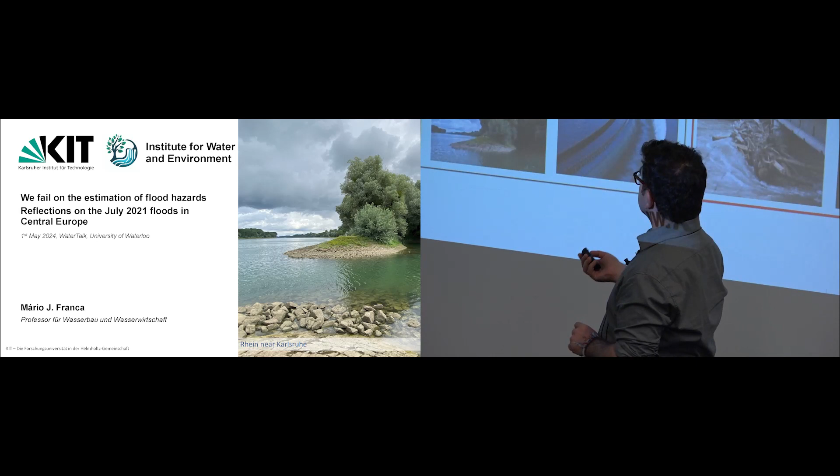Just before that, I want to present ourselves a bit. In Karlsruhe, we have a group, an institute, called the Institute for Water and Environment. We have 5 professorships. Olivier Eiff is here as well, he came to visit, and David Evans, who is in my group, is here too.

We embrace research from the very fundamental aspects of fluid mechanics, and then there's a kind of growth up until more practice-oriented research. So we do the bridge between fine-scale research, if you want, towards the application.

We have two positions that will open very soon, in case we need good candidates. They are tenure track positions. One, hopefully coming before the summer, though administration sometimes takes time, is in fluid structure interaction. Another one in urban water management will come a bit later. We have to search for good candidates because they are rare these days.

Some more information about ourselves, since we are searching for collaborations and internationalization of our programs. We have a master's in English on water science and engineering. It's an international master with 3 profiles: one more oriented to water quality; one, where me and Olivier are, more focused on fluid mechanics and hydraulic engineering; and one more on hydrological processes at the catchment scale. It's a 2-year program, all taught in English, which may be an attractive opportunity for some of the students.

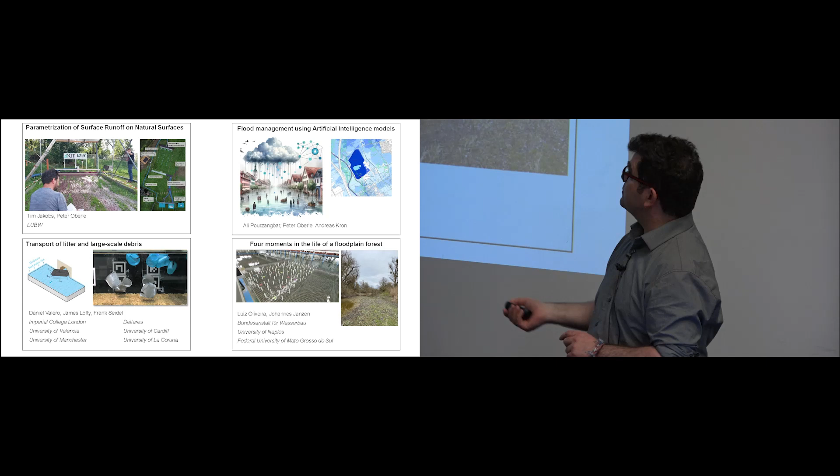This is my group specifically. I'll go briefly through it, but as you can see, our aim is more on the practical, application side. We have a laboratory with 25,000 square meters, so it's a big laboratory where we have bigger installations, also for reduced models, consultancy with reduced models, but also for fundamental research.

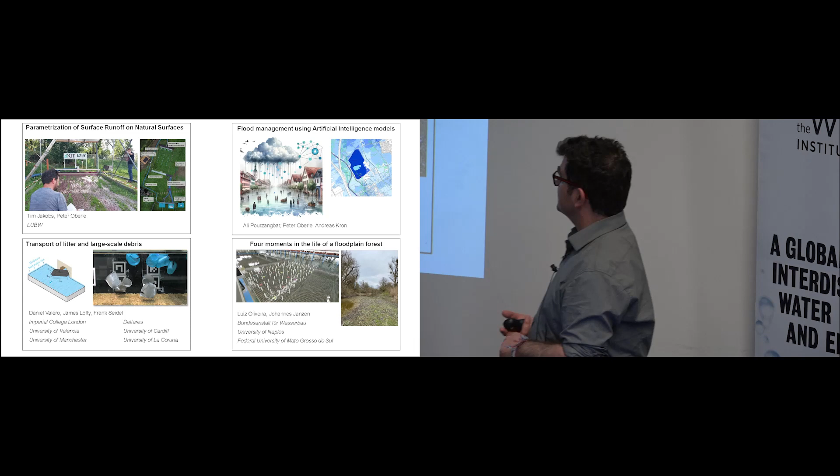Some examples of research we do at the moment are all more or less related to hydrodynamics aspects, but also mechanics of transport of sediments, of plastic as well, and some eco-hydrology programs. Maybe what's more interesting for today's talk: we hired someone last year, Ali Pourzangbar, a postdoc, who is trying to apply new techniques to speed up the process of understanding floods and also to speed up emergency planning in terms of flood management.

That's all, okay? Let's go for my talk now. So first, why am I talking about floods? Probably Bruce or Colin or someone has heard me talking about floods.

I've talked about sediment transport and turbulence and these things. But I worked as a consultant for several years, and I did many flood management projects.

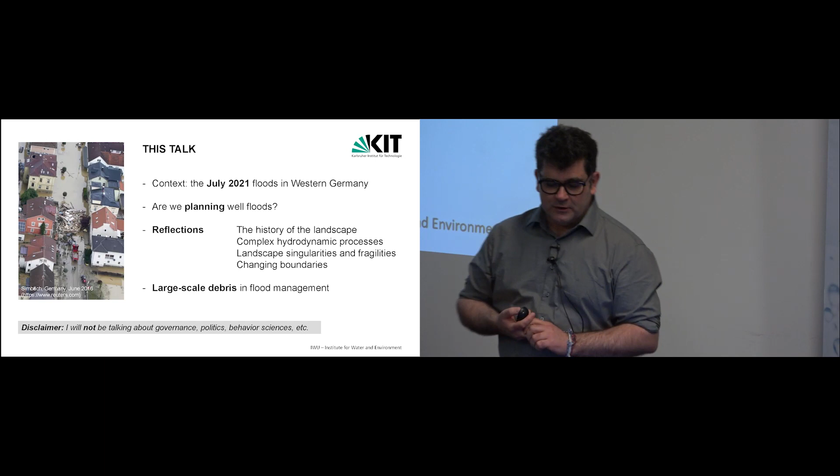The talk today will go through these aspects. I will introduce the July floods with some general information that I have. Then I'll make a challenge with you, and then do reflections - as someone working on rivers for several years, we look at floods, we look at what happened, and these are things I think we should be looking at when we plan for floods. I will present some new results of research that we just published last year and this year, inspired by what we observed in the floods.

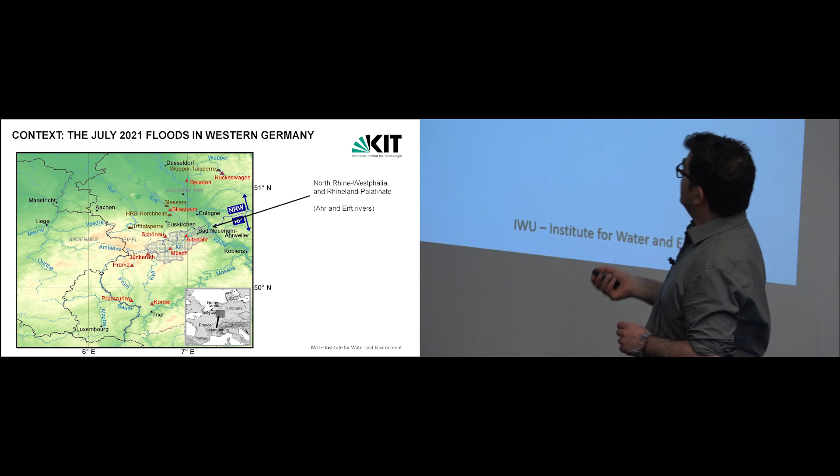This is where the floods happened. The main affected region in Germany was near the border with Belgium, Luxembourg, and the Netherlands. The main problems occurred in the Ahr River and the Erft River in this area. Near the border of the three or four countries were affected, but Germany was heavily affected as well.

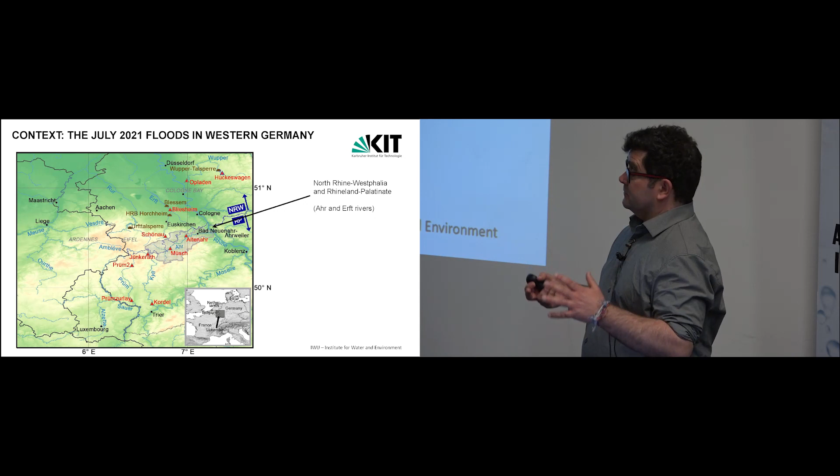These are general numbers, but just to have an idea - 6 inches, I hope I did the conversion correctly, so 150 millimeters occurred in less than a day. It's a lot of water pouring down, and this was due to a convective storm that stayed there for some hours and just poured down all the water it had.

Big numbers - I think this isn't even updated, so I think it's a bit higher, almost 200 fatalities. For a country like Germany in the center of Europe, for Europeans, it's a catastrophe. It's even damaging our way of thinking. It was quite a paradigm change, and it's somehow prompted lots of research about this as well.

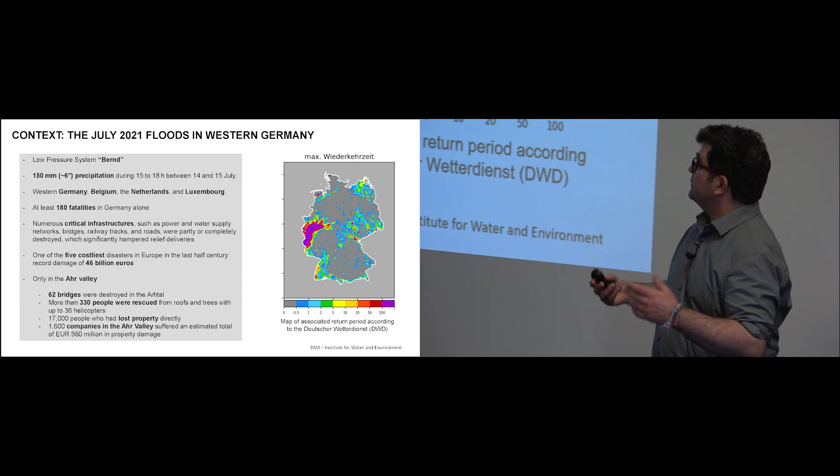Just some examples of big numbers: 62 bridges collapsed in one valley, and many other disruptions. For several days there were disruptions in communications and transportation services. So it was a significant disaster that occurred.

Now I'll put a question, I'd like to make a kind of game with you. I don't know if you were Boy Scouts - I know that probably you were, and you probably did this game. Do you know the Kim game? I will show you some images, and you just have to remember what you saw, then I take the images away and you tell me what you saw. Is that okay? We'll do it fast - I will count to 5 and change the images to make it fast.

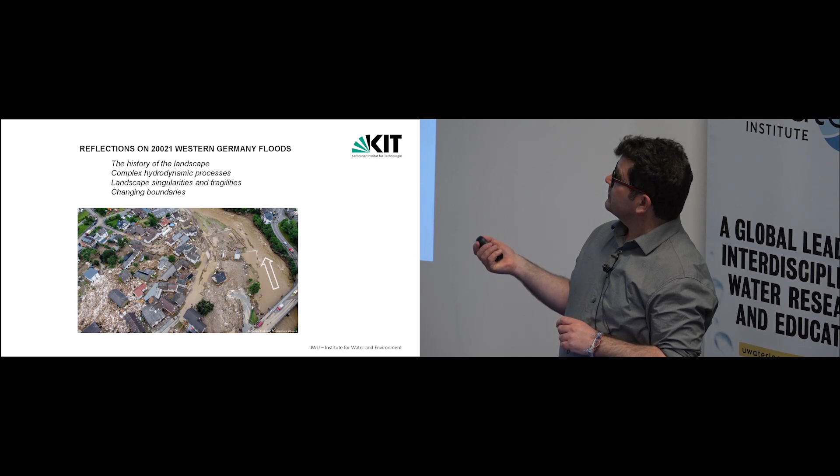We will see lots of images like this, quite catastrophic as well. I'm going to talk about four topics. They are very personal reflections, so they are questionable, of course, and we can discuss them at the end. The first is...

What I said, we should look at the history of the valley, and I'll show you what. Probably it depends a lot on the countries, but in some countries it's still possible to construct, for instance, in floodplains, in places where we saw things happen in the past. I just brought this example.

Those studying rivers, they know what this is, and you know what an oxbow lake is. So a fluvial hydrologist or hydraulic engineer should know these processes that happen and should recognize when they see a landscape, some remnant oxbow lake or something. And probably should also know that we should not build there, right?

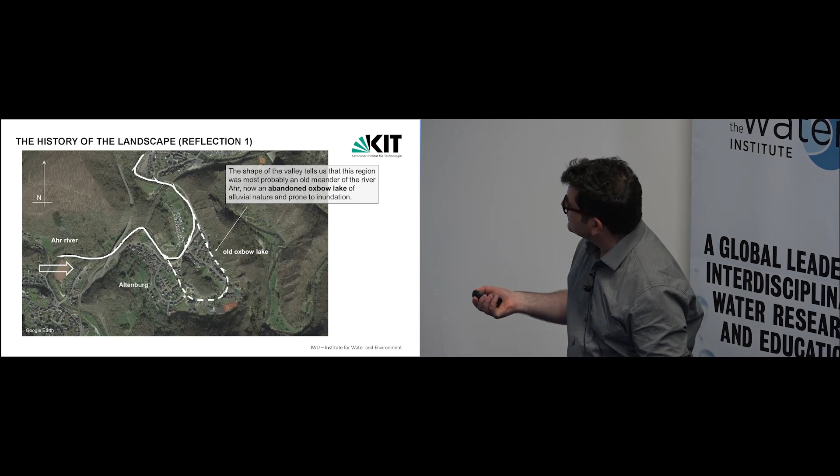So this is one of the things we brought. This oxbow in the Altenburg, which is in the Ahr valley, one of those two rivers affected - this is what happened, so that's the effect. The flow goes like this usually, and this here. So basically the urban development was all made in the Oxbow Lake, which of course with time, well, things could happen. So this is the first reflection.

Maybe it's a bit obvious, but apparently it's not so common to think about these things yet. There is an advantage downstream - this is a small one, but of course all these oxbow lakes, all these lateral areas of the flood, will contribute to somehow mitigate the flood. So maybe it's even good that we are here and that we can activate them. But of course, settlements in these areas should raise some flags and should indicate that we should not build here. They are reconstructing in the same site, just in case.

I think that's one of the problems now. The second - I put this image as well. I'm not going to go into these details here, and Colin is here, he will even detect some errors that I can do about this. But we know some things that happen in rivers. We don't know everything, right? But for instance, we know how the flow processes in a riverbed.

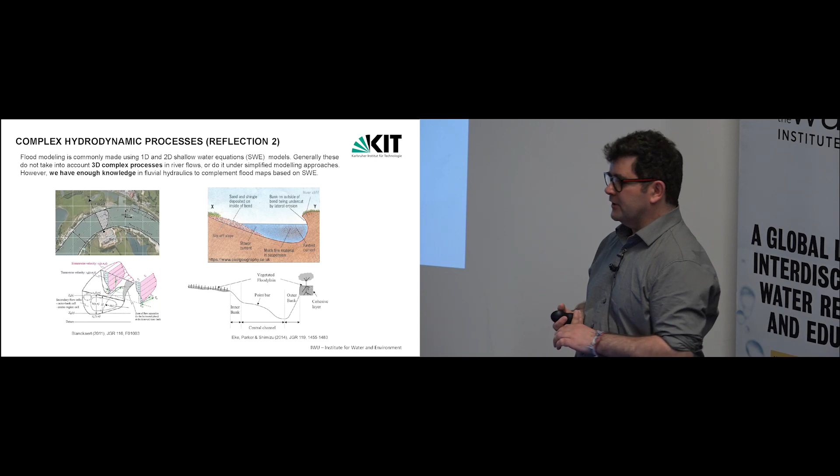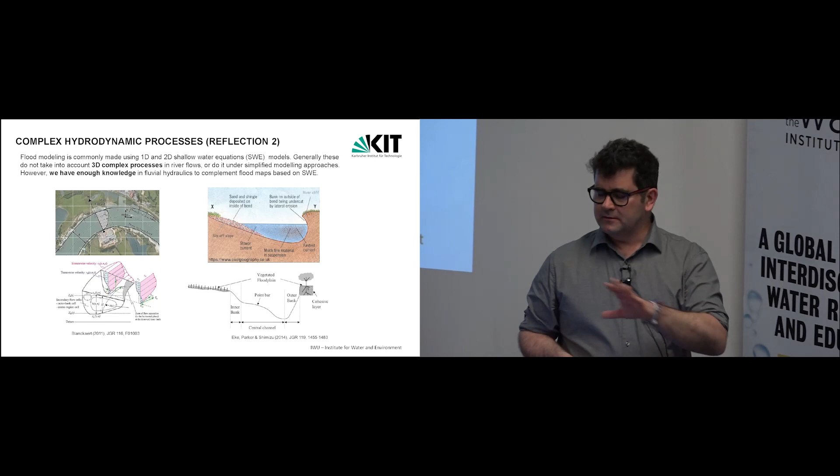These are images from classical studies that we found in the literature. And again, when we do our flood propagation, typically, okay, maybe in this channel we'll use a 1D model, we'll just propagate the flood laterally, but we could at least see, oh, there's a bend, there's something that can happen here. So it's a second reflection - we know better than we are doing, I think, in my opinion. At least we have more knowledge than we are applying.

So this is another river, this is the area as well in Schuld, another town. I'm not sure if it's downstream or upstream of the other, which has the river going here around with a nice meander, it goes around here. And this is a pre-flood, a pre-incident image, if you want. It could not be very hard for a student in fluvial morphology to imagine that in a flood, we could have some deposition here and some deposition here, all along the valley.

Again, this is what happened in the valley. So this area here, it's not indicated, I'm sorry, but it's somewhere here. And I think this is an image from the top here - this is more dramatic, we can even see the streamlines of the flow almost with the trunks.

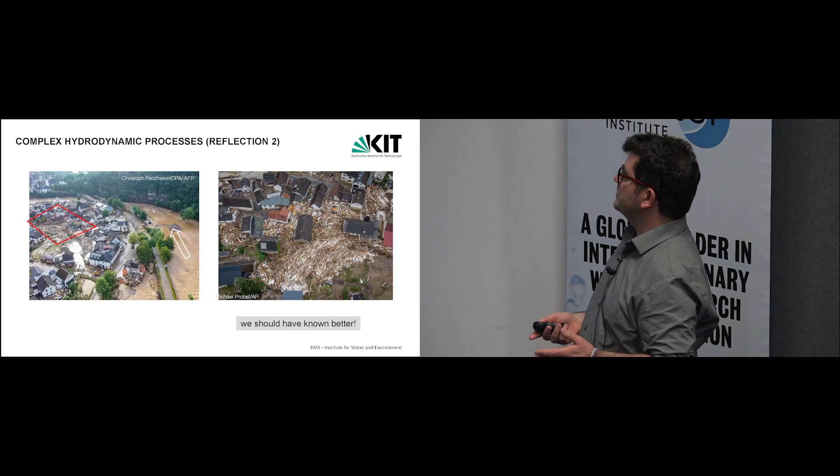So again, the question - yes, maybe we should have known better. And of course, it's very hard to model the whole valley if we want to do something efficient in the company. But we could just, after our modeling, go around and see if there is something that, okay, maybe here we may have a problem, maybe here we shouldn't. So second reflection: the complex hydrodynamic processes - I think we already know enough to somehow integrate them, even if it's just ad hoc and a bit simplified, integrate them into flood management.

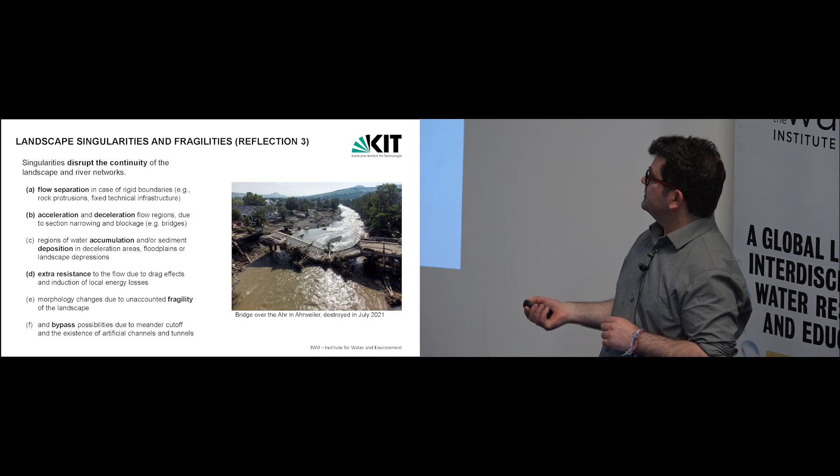The third reflection is about landscape singularities and fragilities. We know that if there is a singularity in the flow channels, there will be flow separation, phenomena of local acceleration and deceleration, and these will also impact flow resistance, local erosion, and deposition.

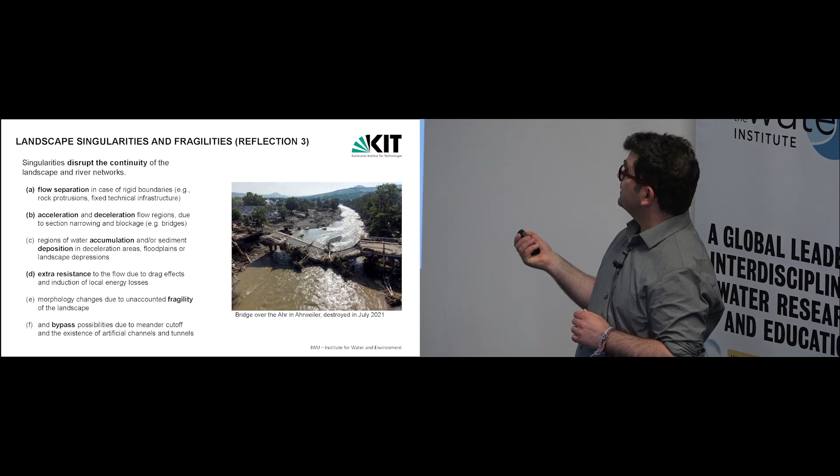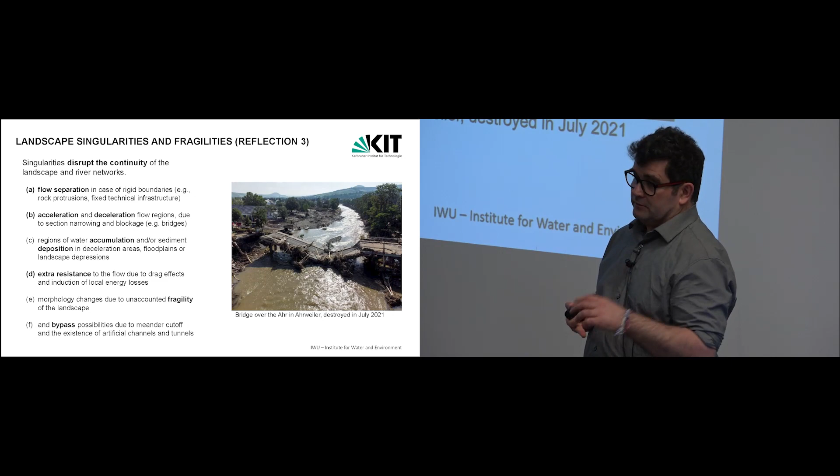There are some clear examples of not very well studied singularities. The most obvious singularities in the river are maybe the bridge piers, which we are not studying well. This causes specific and singular problems in the valleys when floods happen. As I said before, in this valley, 62 bridges were destroyed, and the financial impact of this is huge.

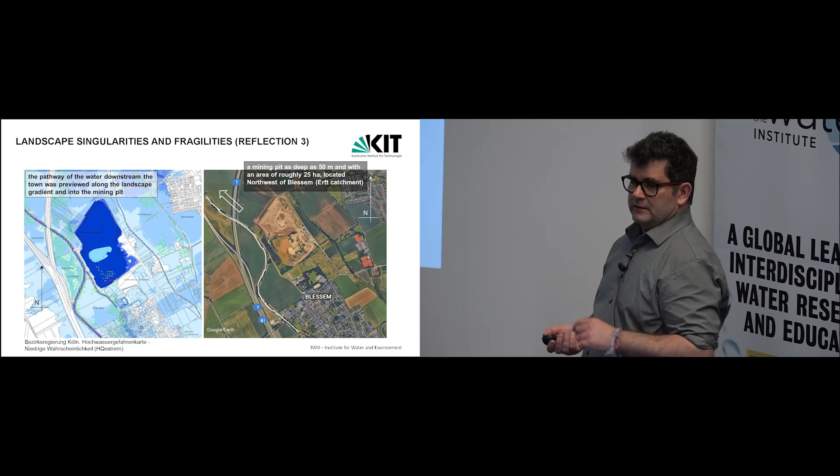I'll pick up another example which I think is more interesting. Let's look at this image first. This is the flood map for the extreme flood that was done for the municipality. The river goes somewhere here. The flood map preview isn't very clear, but the darker blue is the inundation areas. It was already previewed that mostly this area of the town would be flooded.

But this is interesting, I just checked this on the internet - these are public records in Germany. You could see there's this special feature here. Someone who made this flood map indicated some strong velocities in this area.

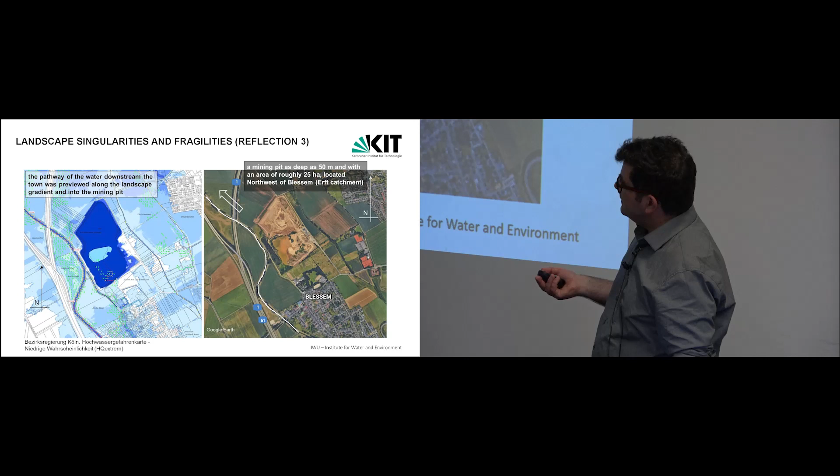This is a Google Earth image of the same area before the flood - the river goes here. What is this here? This is an old mining pit, still active I think, where they extract gravel. This was maybe 50 meters or more deep.

And what the flood map says is that somehow the water will go into the pit during the flood. But nobody really looked at this detail - we look at the map and do our emergency planning, and nobody noticed this. And what happened was this.

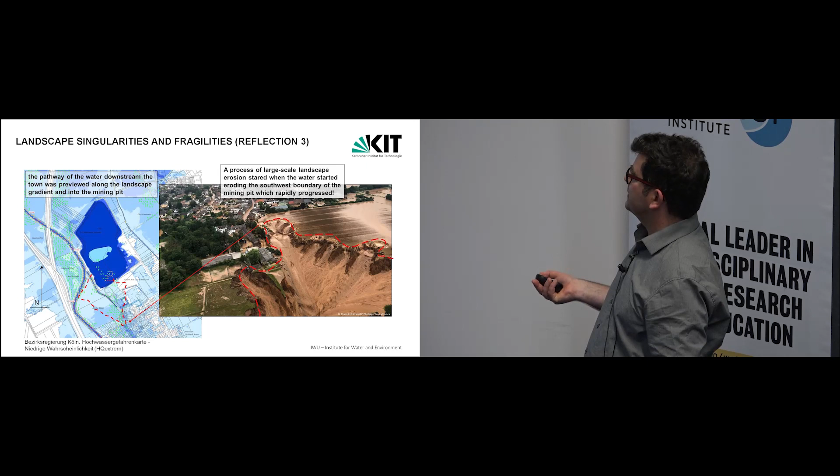Let me explain this image - this line here was reconstructed by me, so there is some uncertainty. But basically the flow went inside the pit and carved this huge crater of 20 meters, which just stopped at this building.

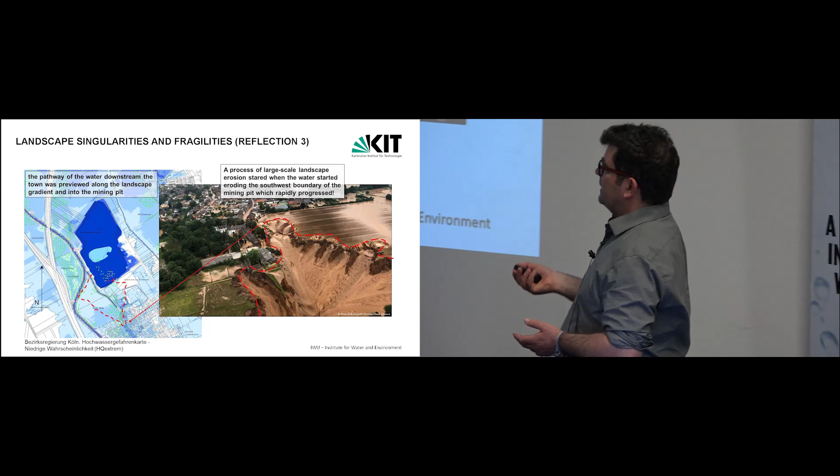What we may argue is that if we do our flood maps, we can even look at velocities because we have that data. If we want, with something like an HEC-RAS simulation, we can even get bed shear stress - it's an estimation, a model, but we can have it. If we put that on top of a geological map, we might have imagined this could happen. We couldn't have modeled it exactly, but some red flags could be identified at the planning phase.

I don't know exactly what will happen, but something will happen, so maybe we reinforce this area or prepare for it. There were other singularities and fragilities in the landscape that could have been foreseen with a better inspection of the flood mapping and flood emergency planning results.

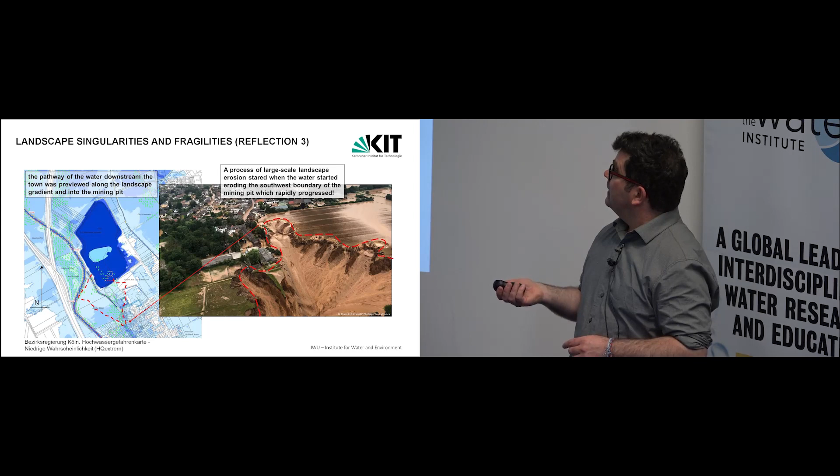Here's a final diagram, let's see if we understand. The original pit was here, this is where the water went in this section, this is the building that stayed hanging there, and this is where the erosion happened. The channel, the river, went like this and like that, and it dried afterwards.

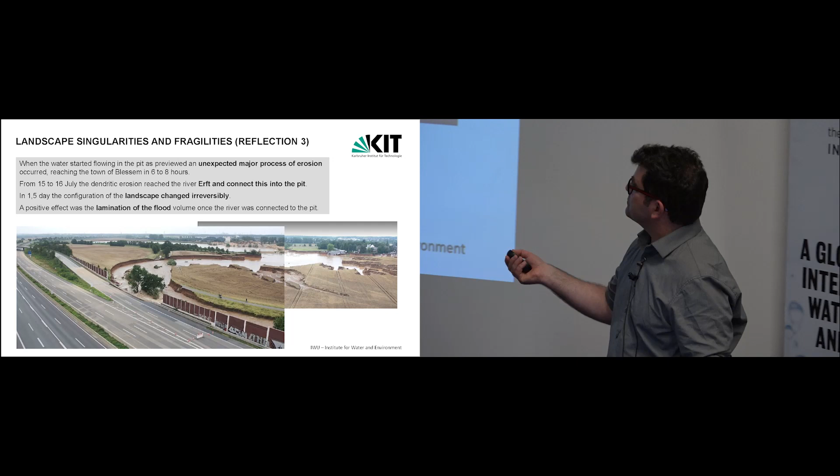At a certain moment when this happened, there was an advantage - the flood stopped downstream because that pit was so big, it absorbed the rest of the flow.

There's also another point - there are lots of these mining pits spread around Germany, especially in the Rhine valley, because it's alluvial and full of gravel, which was heavily exploited for construction. Maybe we could use lots of these abandoned pits to attenuate floods one day.

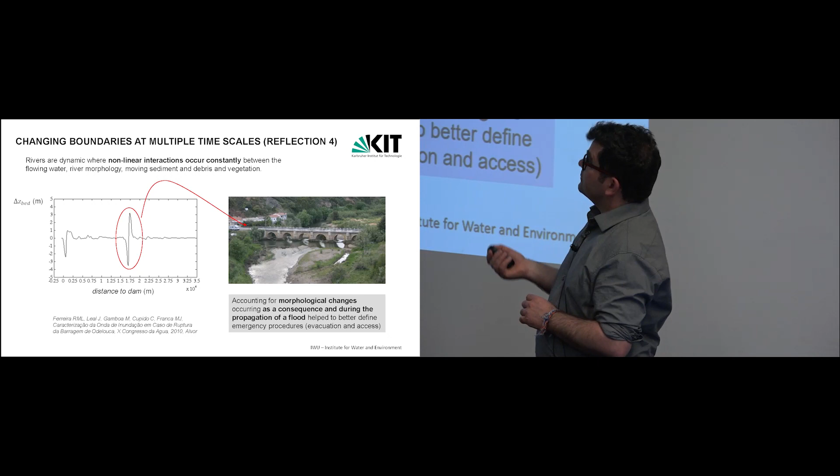The final reflection is about how the boundaries are changing during and before the flood.

This is about how we do flood planning or flood management. We look at the channel, use LiDAR, take today's topography, and do our modeling. Even if tomorrow the topography is different, it stays there for 20 years. I don't know how many times you review these things, but we don't really care. But the truth is, if there is a flood, things change, before the flood and during the flood.

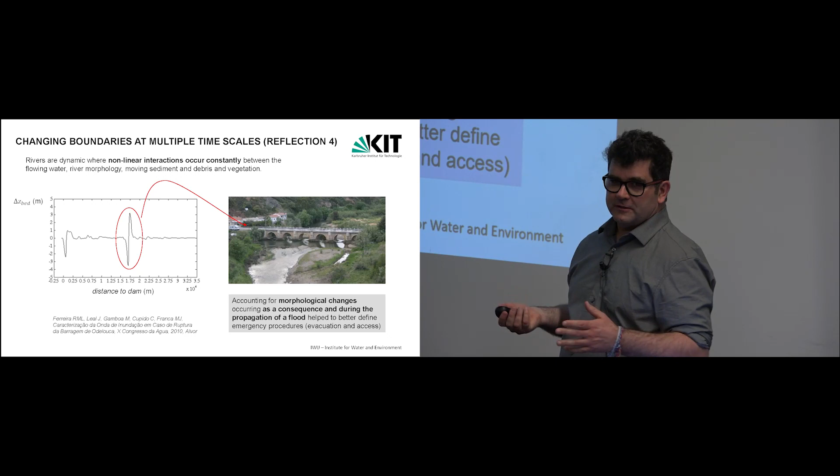I bring an example that was not proved or validated, but something I did some years ago with a colleague from Lisbon, Rui Ferreira. We did some consultancy for dam break emergency plans for dams, and this was a dam break study. But we are academics, so we decided to look further.

So we used the model from Rui Ferreira, where we can see the dam break propagation, but we also can see morphology changes in the valley. This is the valley downstream of the dam, a dam in the south of Portugal, about 3.5 kilometers downstream. This is the result.

This is the bed, how it changes. This is the delta Z, how the bed changes downstream the dam in the case of a dam break. We detected this in our simulations: there will be a huge erosion pit and then accumulation, which corresponds exactly to the narrowing of the valley, where there is an old bridge.

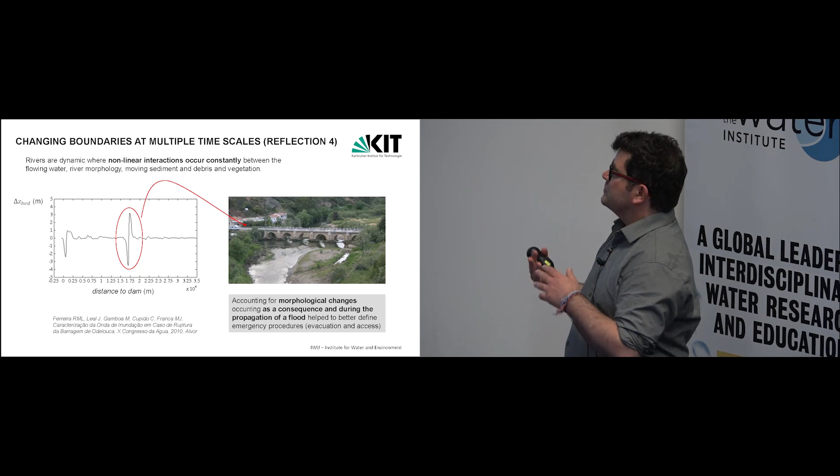The access to the dam requires crossing this bridge, and the firemen and civil protection are positioned here. So we forced the civil protection to change their whole paradigm of emergency, because we told them this bridge probably won't stay in place if there's a dam break. We succeeded in convincing them and they took us seriously, but for future studies we told them they should ask people to study morphology changes too, because there are things we don't otherwise see.

I don't think this was accepted, but this is an example of how we should consider morphology changes in a dam break case. Of course the models have uncertainty, whether it's 4 meters or 3, but something will happen there. If we look at it, it's obvious that something will happen.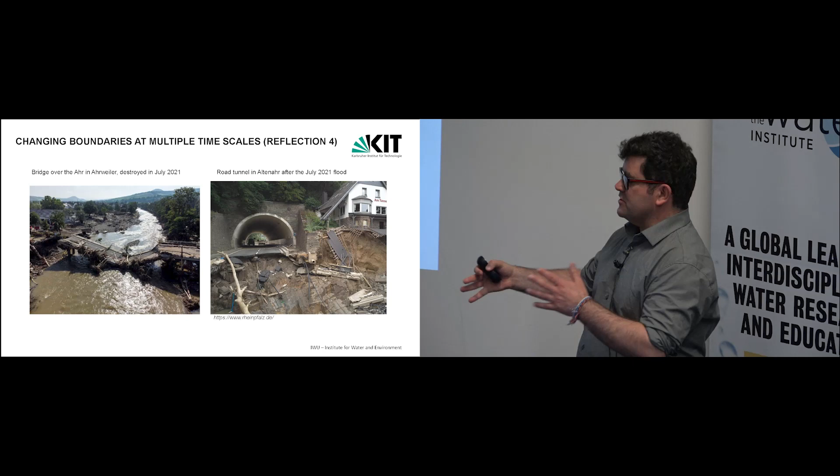So many things happen during floods: erosion, local erosion of bridge piles, destruction. This was curious, the water just entered a tunnel and provoked huge erosion here. There was a huge erosion here that changed the aspect of the valley completely. I think we're starting to have models, even with some approximation, that tell us the main morphological changes that may happen during a flood, and we should use them.

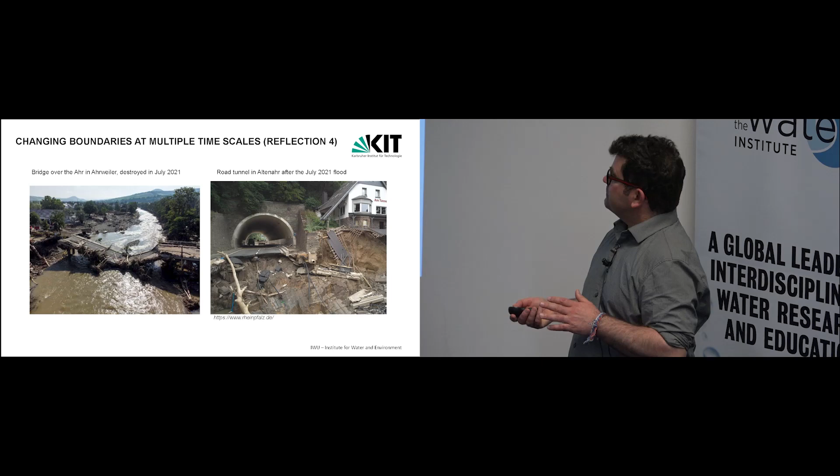But I'm going to talk about other things as well. I think the valley has multiple changes at multiple time scales, these are the time scales during the flood. But for instance, this valley in the town of Dernau, the Ahr Valley, also changed along a century. In the 1880s, they constructed the Ahrtal railway system, called Ahrtalbahn, the railway of the valley of the Ahr, which ran through the valley, I think as a scenic thing to do.

Let's look at the valley. The river comes here, the river Ahr. This is really a lateral floodplain, very flat. You can't see it here, but this area is quite steep, the banks are steeper here than there, it's quite carved, and then it widens again here.

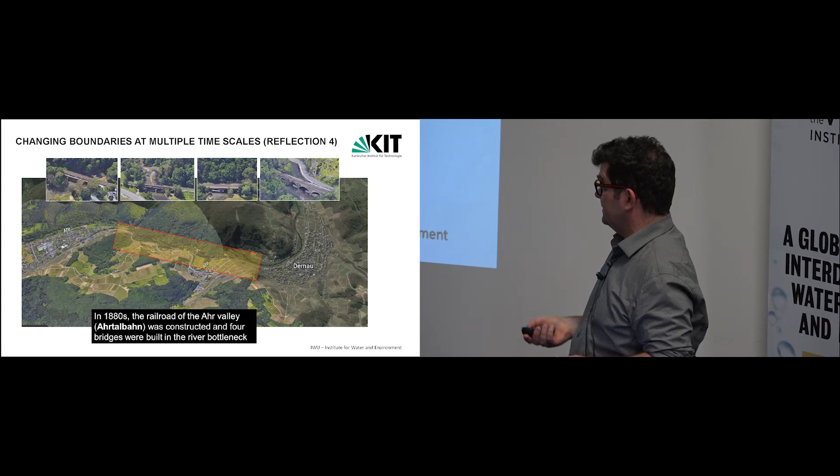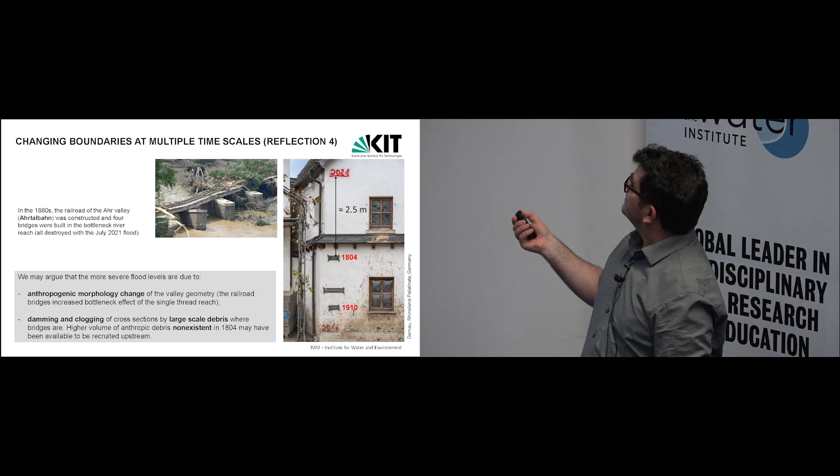So the Ahrtal railway was constructed here, and along this part they built 4 bridges, but those old bridges from the late 1800s all collapsed, so the Ahrtal railway just disappeared. We don't know quite what happened, but probably they collapsed, got clogged, and there was a dam break. By clogging, what happened in the Dernau town was a flood much higher than before.

Our hydrologists and meteorologists could reconstruct this huge flood from before the construction of the train system. They said, don't ask me the methods, but the maximum discharge was pretty much the same as we had 3 years ago. But the effects were 2.5 meters more.

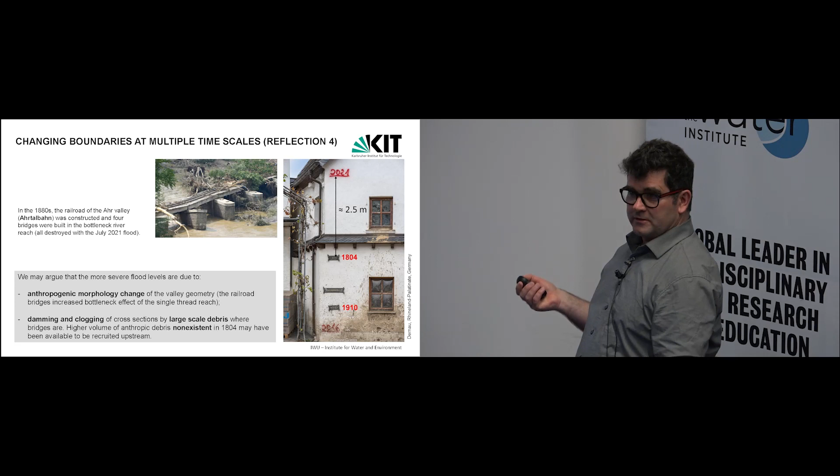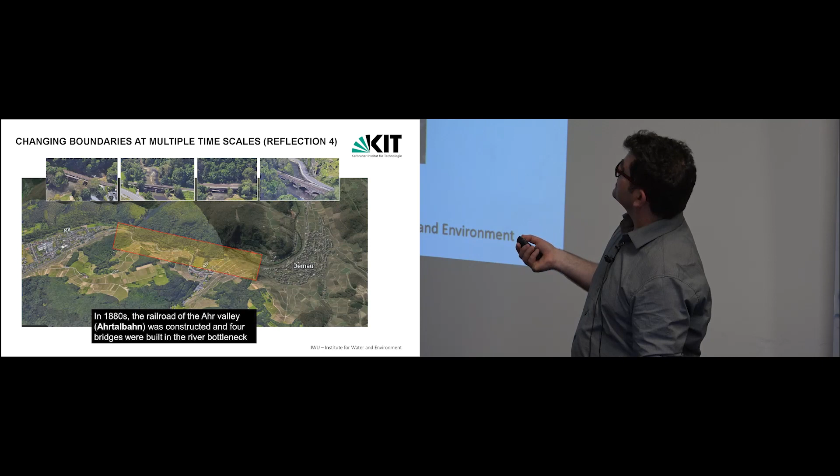So again, there was a change of scale of the valley, but when we did our modeling, we probably modeled this with a 1D model or something. We just put some coefficient of resistance, extra resistance because of the piles, but we didn't account that here we could have a completely blockage of this valley, at least for some hours, that will inundate all this part. So the bridges are here, and we can see that if you have a trunk or something, they get clogged very easily.

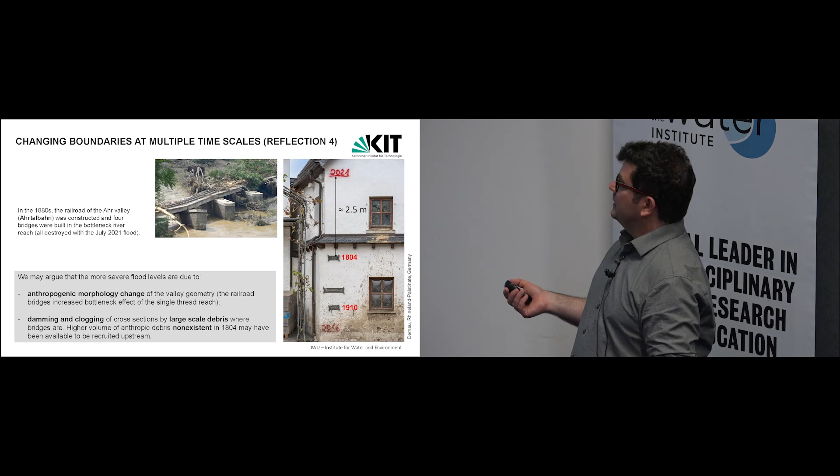We don't have ice jams like you have here, but it's the same thing. I think we could do a bit better than this. We don't know much about how wood is transported and recruited in the landscape. Mostly we have papers about it, not really textbooks, but we can already estimate how much rubbish will come to a section like this.

Okay, and now I always go fast. All this prompted many research efforts in Germany, in my group as well. We started thinking about what we can do to change things, and we started studying transport of large-scale debris, urban debris, let's say. I think this is something you are doing here as well, so it's very nice that I can explain this.

The first studies we have just published about this subject. So again, my town in '89 - this was a huge flood. It was, I found it funny in those days, but of course it was not so funny for the rest of the population. And I decided to give DALL-E, this artificial intelligence image generator, these images, and I asked it a question.

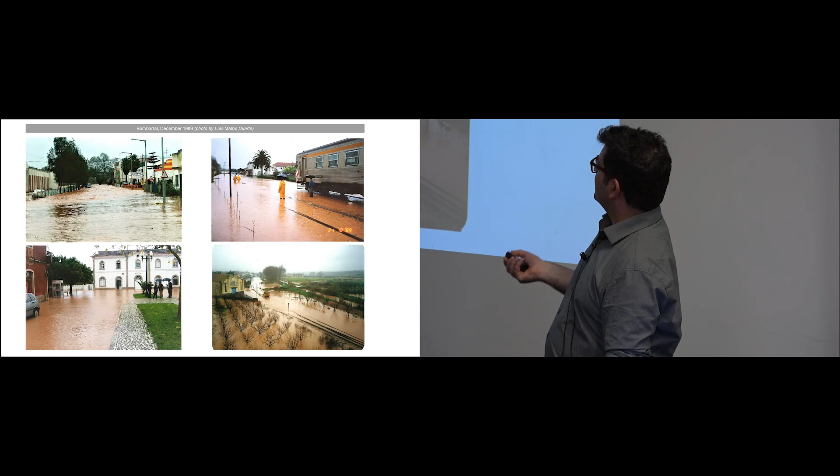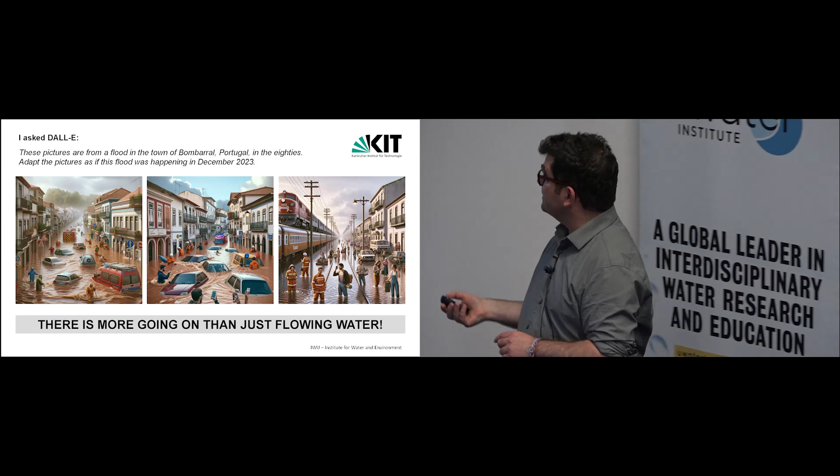And again, there is more going on than the flood. If you imagine a flood in a situation like this, or a flood in '89, where we used to play football in the streets, there was a car every half an hour. There is a big difference, and this is what prompted us to investigate how these things are transported.

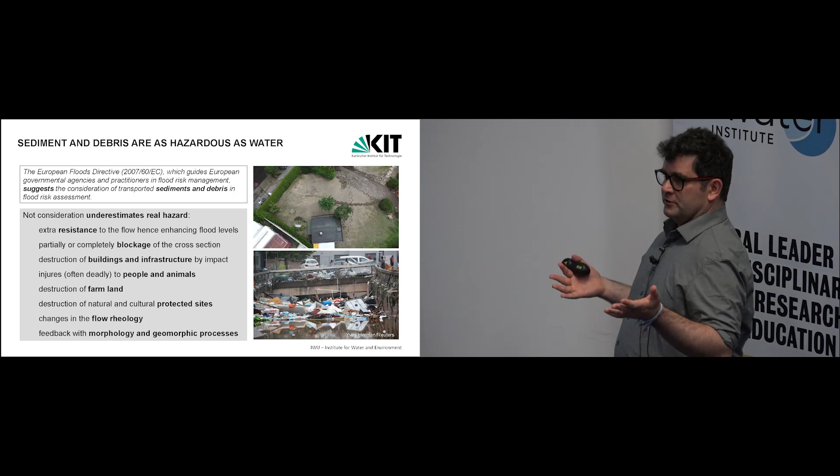So, what does the European Floods Directive, or Water Framework Directive, say about considering things other than water in flood management? Just for information, in the European Union we have large-scale laws imposed by the EU that then slowly have to be adopted by the countries. And there is one regarding floods.

That is regarding flood risk management. Some things in the laws are compulsory, and others are suggestions, like the consideration of sediments and debris - it's suggested, but not compulsory. But we know that moving debris and sediments cause extra resistance, blockage of channel networks, and even destruction of or impact on buildings and infrastructures, injuring people and animals, etc.

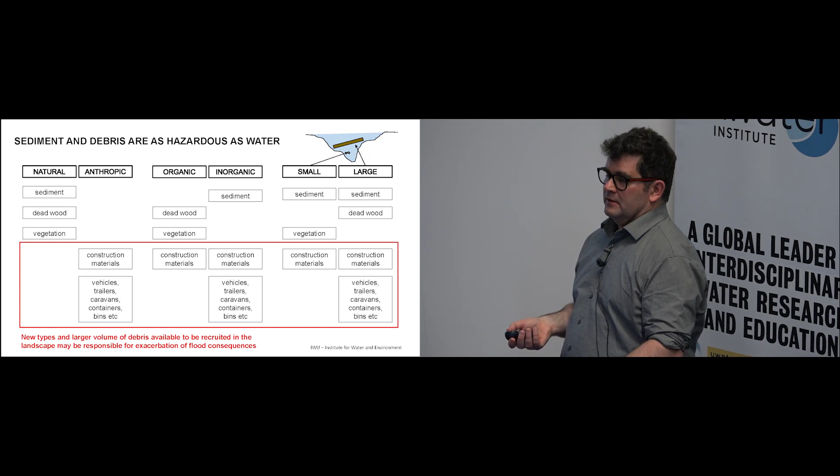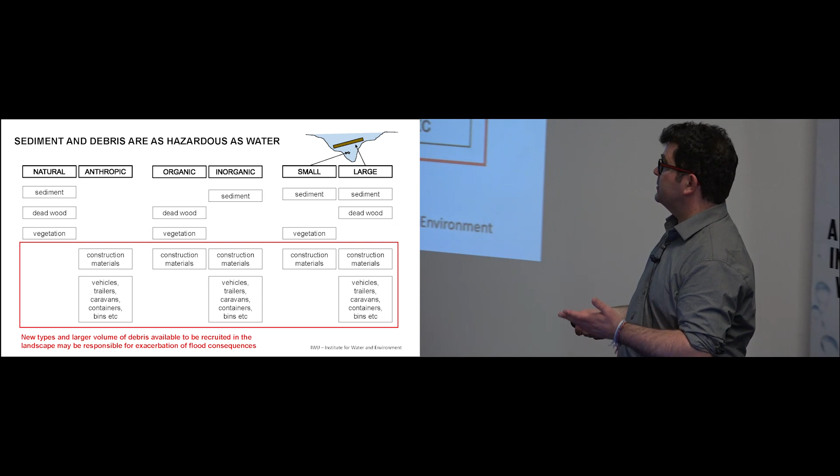An interesting thing as well - we tried first to classify things very simply, sediment and debris. This is the first attempt: natural and anthropic, organic and inorganic, small and large. The interesting thing is that in pictures of floods from not even 100 years ago, 40 years ago, these are not so present. So all this is something much more recent, things that changed in the last 50, 40 years. We see this much more in floods than before.

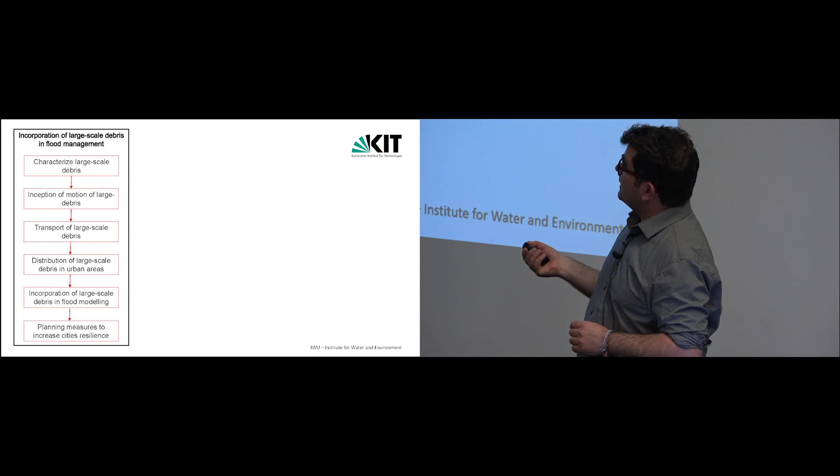So we decided to have a roadmap - how can we consider this up to the scale of engineering practice, let's say. And we defined all these steps. First we want to see what's in the floods - how to classify what's there. First they have to move - how can we figure out how they move, how they start moving?

It's just like sediments, okay, we do the same. Then we have to characterize the transport - how do they transport? How do we integrate, for instance in a shallow water equation model, the transport of a car, of a bin? And then, well, I'm not going through everything. So the idea is to incorporate this in flood modeling.

It eventually comes down to planning measures to increase cities' resilience. This is something we have been discussing: how can we improve our cities so they are more flood friendly? They can evacuate floods better, and they can also be less dangerous for the people who inhabit them. So this is a long pathway.

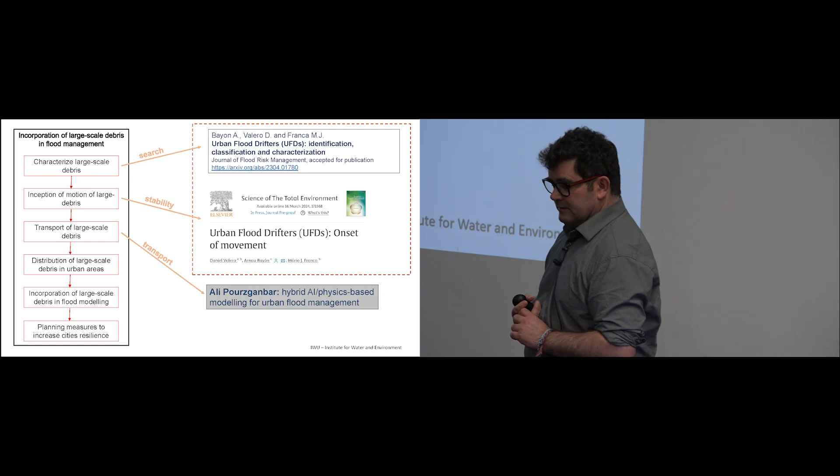We tackle two parts of this, and someone else tackles the third step. I'm going to present results of this. This is what I call search: to identify, classify, and characterize what's there. We also made studies for the stability of this—how do they start moving or not.

With the floods, the first part was collecting post-flood imagery. We went online to newspapers and social media and did our search. We identify, classify, and quantify the frequency and prevalence—how much this occurs nowadays. Then we extract some basic properties of mass and geometry of these elements.

I'm going to talk a bit about this part and show some results. Basically what we did was go online, take a picture, and see in this picture whether we see cars, caravans, and so on—that gives us the prevalence, and then we see how much we can observe in this. There is a certain logic in the search we defined, and I think we obtained quite stable statistics as well.

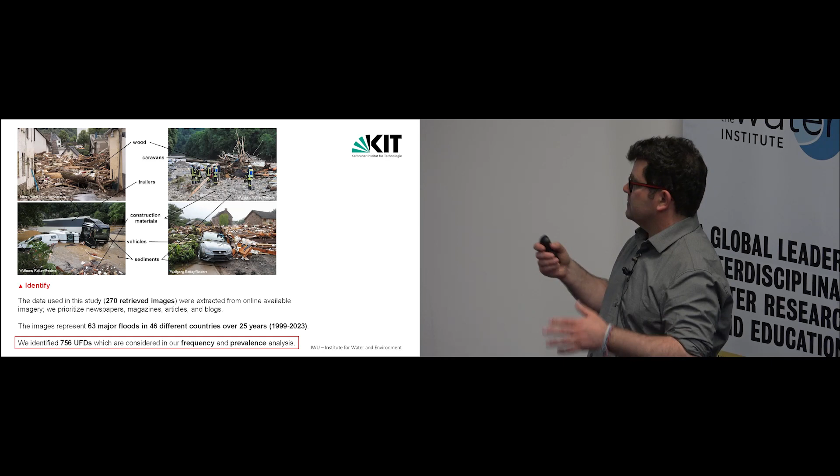We put students to work identifying all these things, and we could first make a classification. Based on what we observed, we classified them into two big groups: the big things, which are more or less compatible with the dimensions of normal culverts, and the small things, which are also very prevalent in floods but tend to clog urban drainage.

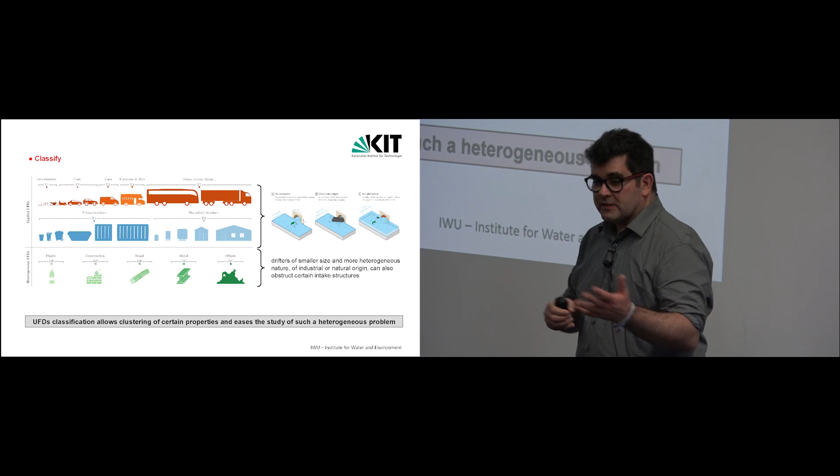And of course, if there are a lot of them, they will also clog. By classifying them like this, we start to get an idea of how to cluster these objects according to certain properties and characteristics. So we classified them—this is our classification. It's questionable, of course, but I think it's a first step.

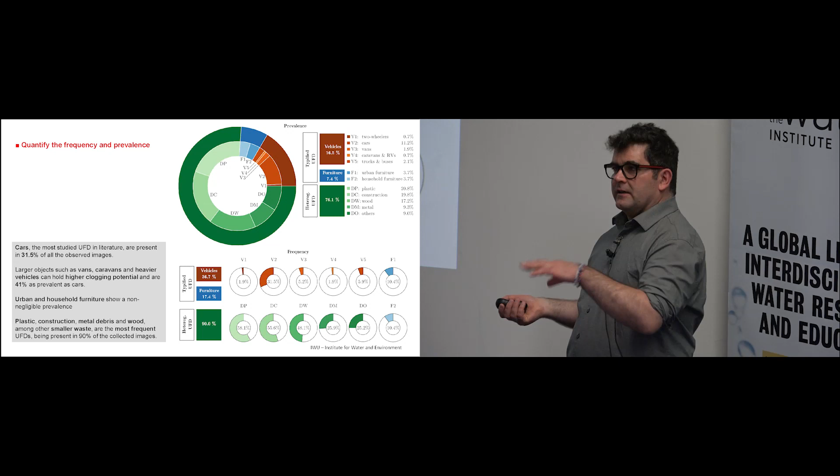The second part was to study frequency and prevalence—basically to see how much they were present in the images, how many images had cars, how many had other things. Frequency is how many are in each image. An interesting point: one of the most studied objects, mainly for car stability, cars only made up about 31% of the observed material in the floods.

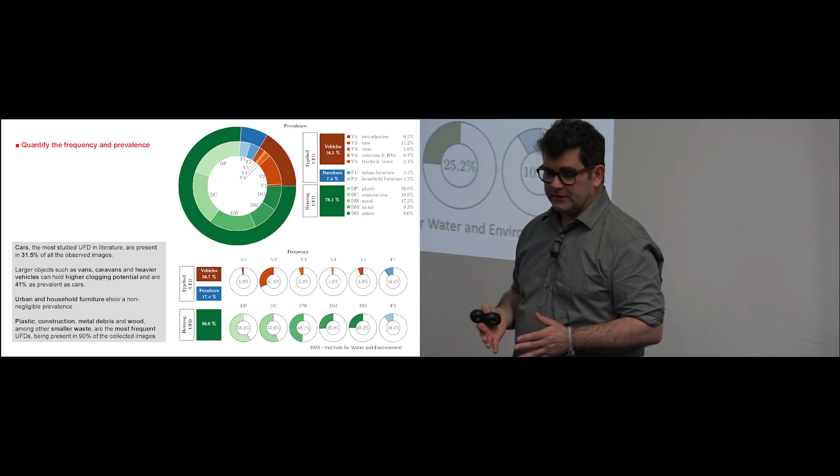For instance, if we look at the large objects classification, 41% of the things we saw were large ones with high potential for clogging the channel network. We did some other considerations as well, and this is the kind of state of the art that can be observed in the floods we analyzed.

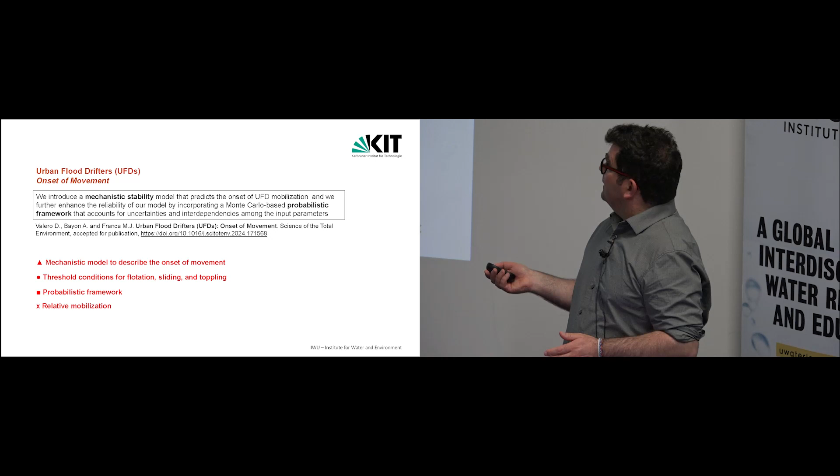The next step was to pick up on all these characteristics and types of debris, large-scale debris, and make an analysis to understand whether they will move or not, and under which conditions. First we had to think about the main parameters relevant for stability if we make a mechanistic analysis.

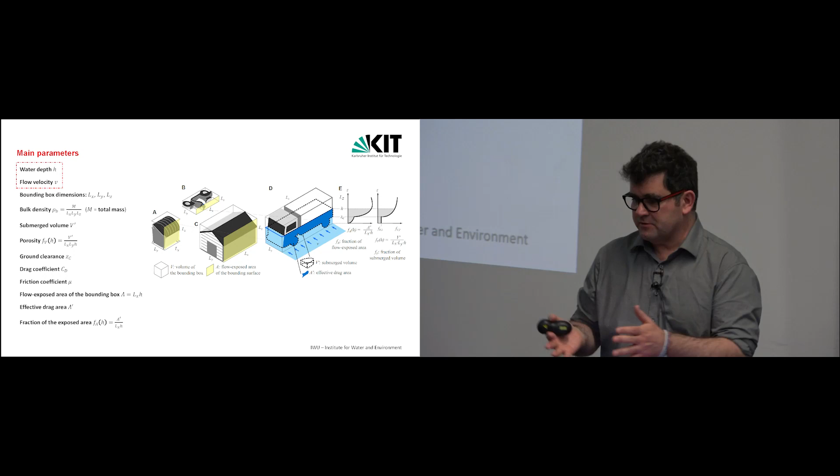This is just mechanics—I'll show the modes of instability, but it involves dimensions, weight, and also what we may call a porosity function. For instance, a car has a completely different exposure to the flow depending on whether the flow is under the clearance or above the clearance. We took all this into account for the elements we identified as the main ones present in floods.

How did we do this? We went to catalogs. My son spent a week looking at this in catalogs, and we had lots of students doing the same—we paid them to identify and research. Of course, cars, trucks, and other vehicles have different dimensions.

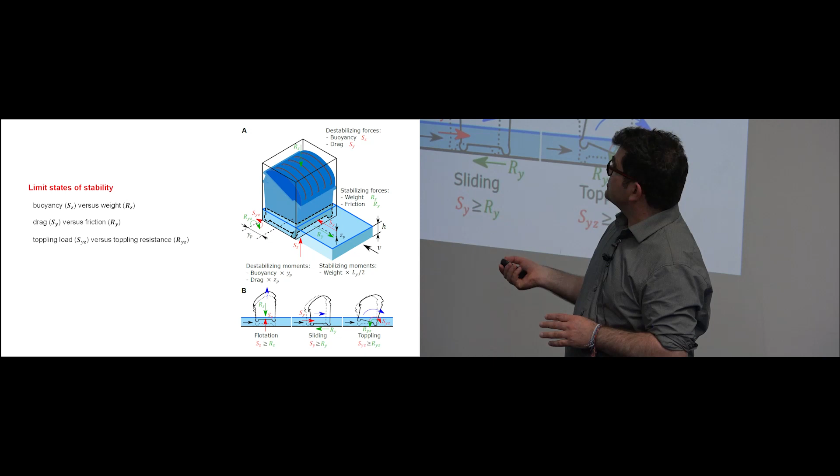First, let's just look at the limits of stability. This is just classical mechanics, right? So what can happen to these objects? They can just float, they can be dragged, or they can topple.

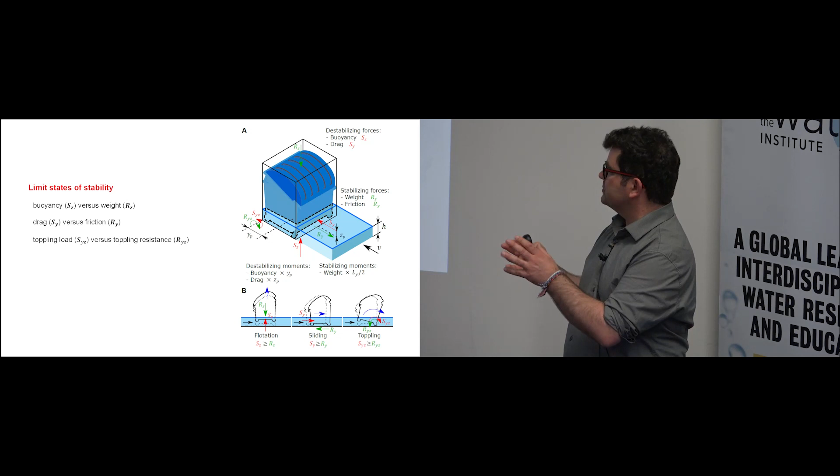This is an example of what we study for a trash bin. So this is how we divide it. I think this is just simple mechanics, and we did this for all those objects, all that variety of objects. As I was telling you, the cars change a lot, the bins change a lot.

So what we did, we just took extremes, and we ran Monte Carlo simulations to combine all the possible elements for each one. So we had a kind of stochastic view of what we may have, and we could produce this kind of stability curves.

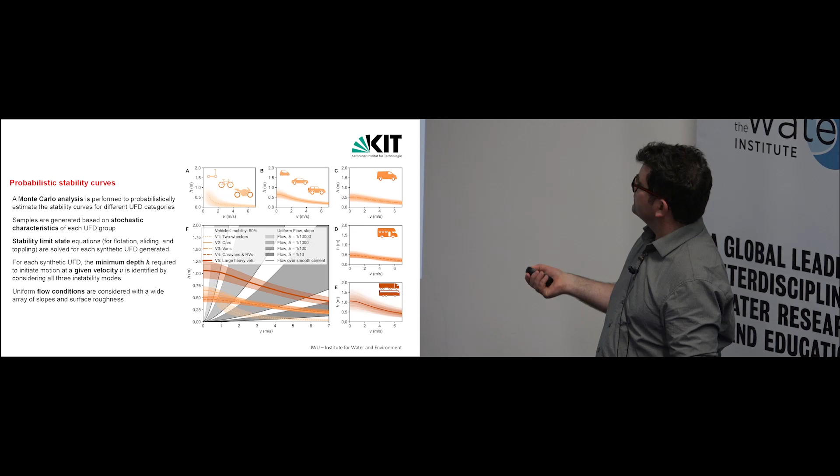So this is for each one of the elements, and they are all here in this place. So how does this work? We go to one of these, for instance vans, which are very popular in Germany, and people like to go on vans on vacations. Well, I didn't choose the good one.

That's maybe two-wheelers, motorcycles and motorbikes. They are here, so they have this curve and some uncertainty. What this curve says, depending on the velocity and the height of the flow, it will be stable or unstable. If this combination is under the line, it's stable. If it's above the line, it's unstable. It's a kind of a Shields diagram, more or less, a stability diagram.

For all these elements, we even had some kind of an abacus thing that, for certain slopes and considering uniform flow assumptions, we can just go here and get an idea of how much, for instance, a large heavy vehicle will change. So if we have a slope of around 1%, this is the smoother, this is the rougher. This is explained in the paper. I'm going a bit fast, but this is more or less the range of combinations of velocity and water height for the instability of a large heavy vehicle.

Of course, it's a lot of information. We don't need to go in detail, but the point is that there is always something we can introduce in the flood map. These are curves that are very well defined, and we can already know in this street, at this moment, if there is this flood, how many of these will move. Next step will be, where will they go?

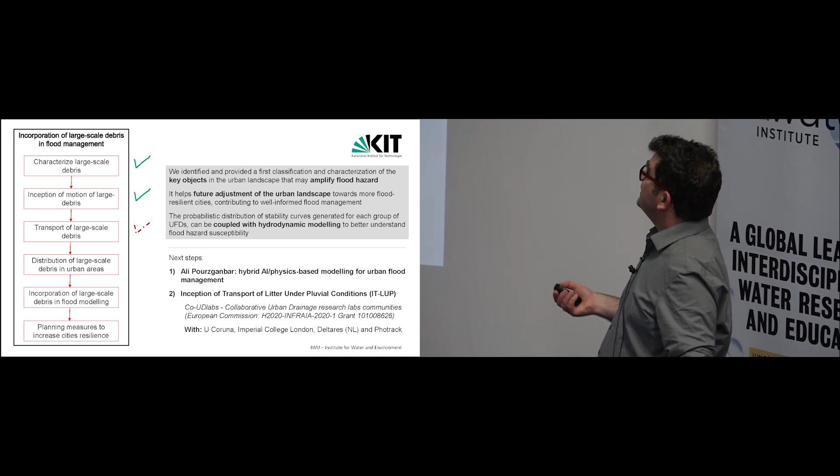Okay, these are the main conclusions. We are here, and of course everything is questionable, everything probably can be more completed, done with more criteria, but at least we have an idea of what's there and how things can move in the urban landscape, and elements that clearly amplify the flood hazard.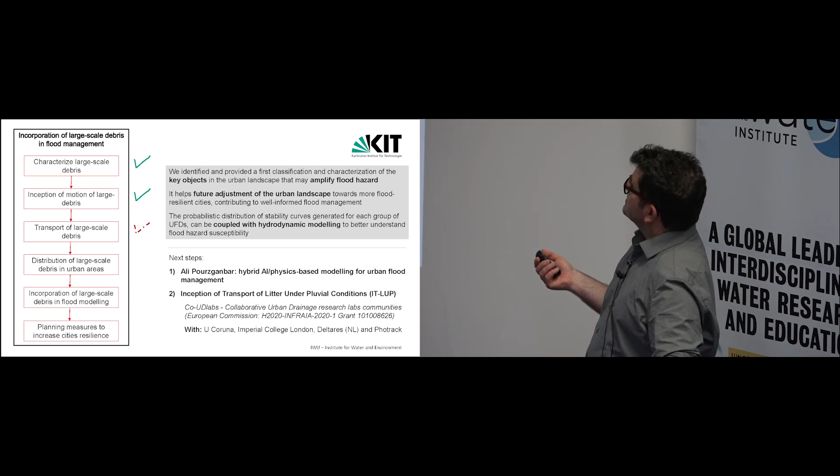And of course, we need to couple this with hydrodynamic modeling, so that's the next step. This may be useful for future adjustments of the urban landscape. Next steps include this phase here, the transport of large debris.

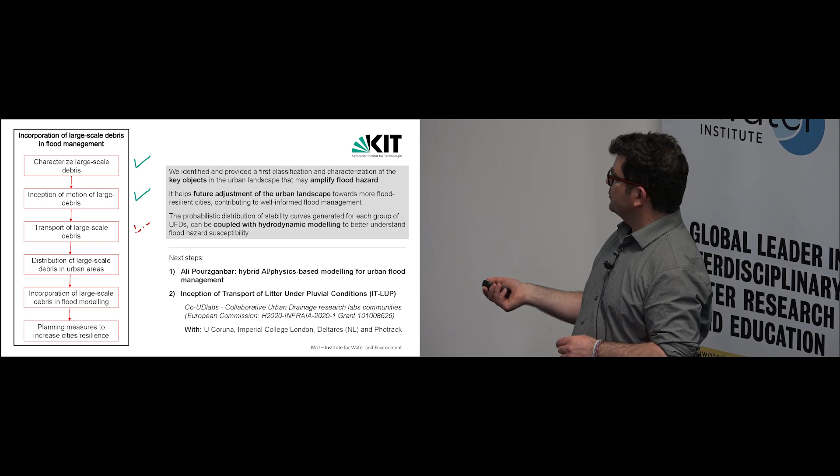We already have someone, and we are in a kind of parallel study, studying very small litter. It's a collaboration with the University of Coruña in Spain. We are trying to understand how garbage in the street will condition the drainage system in the cities. This is kind of a parallel, but somehow related project as well.

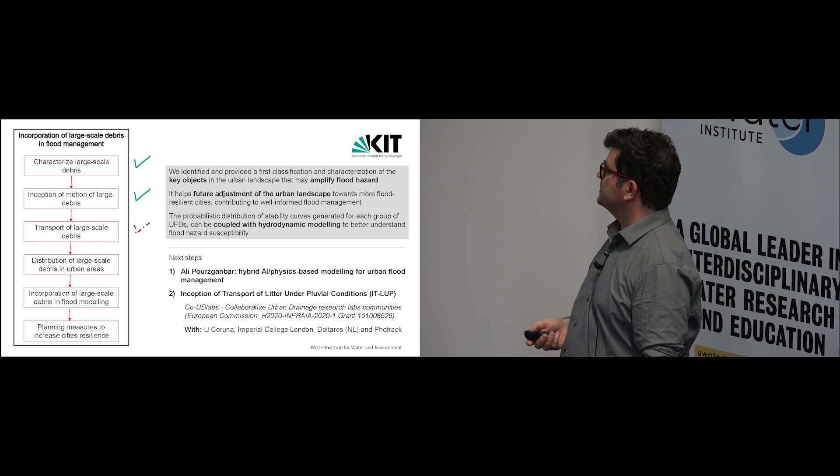And okay, this is all what I wanted to say. This is just a final image, wrapping up more or less what I wanted to transmit.

So it's not only about water, it's mainly about many other things. We saw problems related to changing morphology, and I think many of us study sediment transport and morphology changes. We should incorporate somehow the knowledge we have about this and about more complex flows in flood management as well. This is what we are doing now, trying to incorporate these elements too.

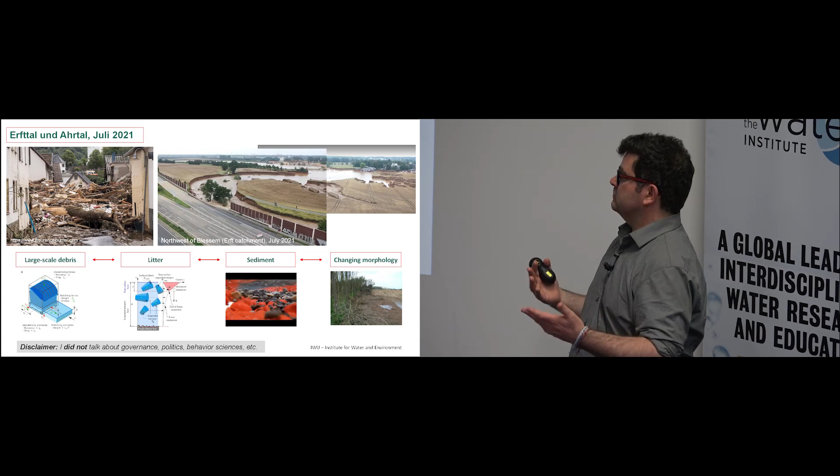First, to know how they move, then we have to know how they are transported, where they can clog, and somehow understand how we can incorporate this in flood management. It's also not clear in our minds, because of course the street on Christmas Eve has a completely different occupation than the street on another day.

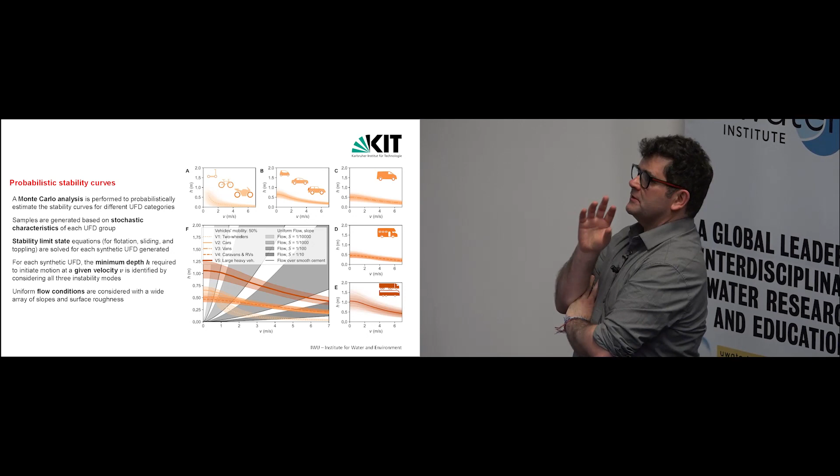So it's not a computation of flow, it just gives the initial motion of the vehicle. This will just tell you if it moves or not—not even the type of movement, whether it's buoyant or not, we didn't address that. So we just put everything here, and yes, it will tell you if it's movable.

Thank you so much. No problem.

Thanks, Mario. That was a great talk. Same comment as Colin had—the head cut coming out of the gravel pit was extremely impressive. I hadn't seen that, it was all over the news. Those are the examples that need to be conveyed a lot more around the world with respect to the impacts of changing slope or gradient very quickly on conditions.

This was more of a curiosity from the analysis and the initiation of movement of various particles, say the size of a caravan. Is there any plan or thinking about doing it more as a turbidity flow? Because individual particles are one thing, but when you aggregate those together with multiple particles and different densities of mud and debris, that takes on a very different behavior.

I would not call it turbidity, but maybe pack behavior or something. What we are starting—we didn't start yet but I hope it starts soon—is to understand one element. We did this mechanistic model for instability, but it's too complicated now to resolve the problem, so we are going to make observations and build surrogate models.

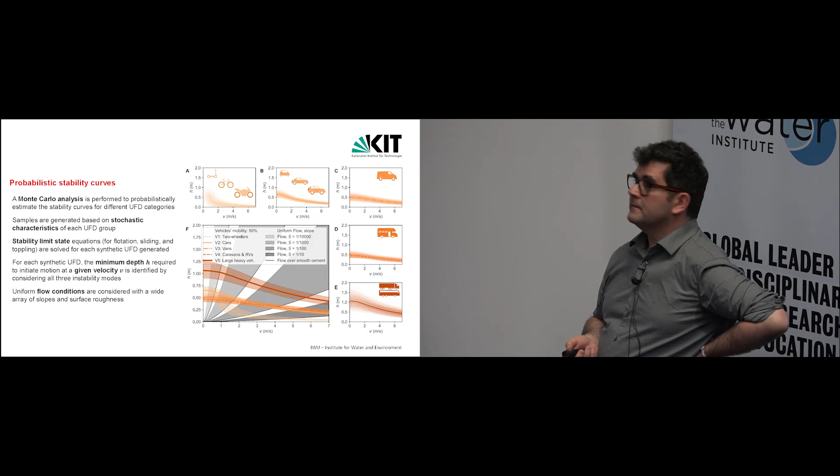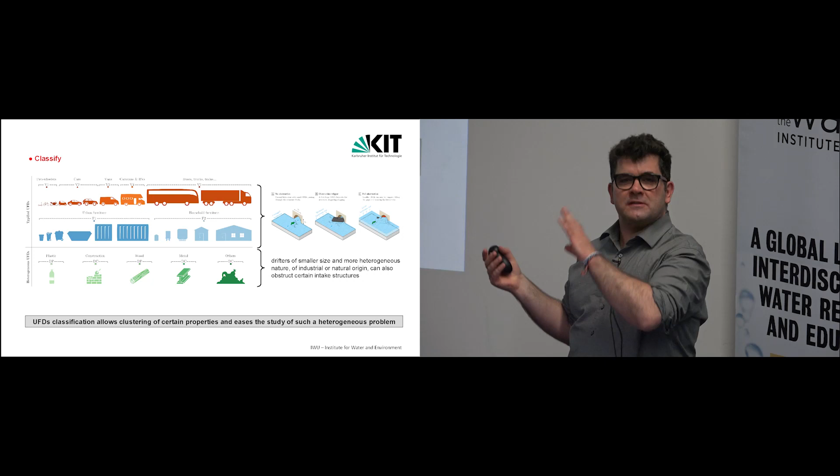This one. So the F, right? Is it universal for all types of debris, or? No, let me go back. So we started by having one curve for each one of these elements. We start by looking at what's there, and then we pick up on that. And we did this, and of course some have more uncertainty than others. So these are the individuals, and these are all of them together here.

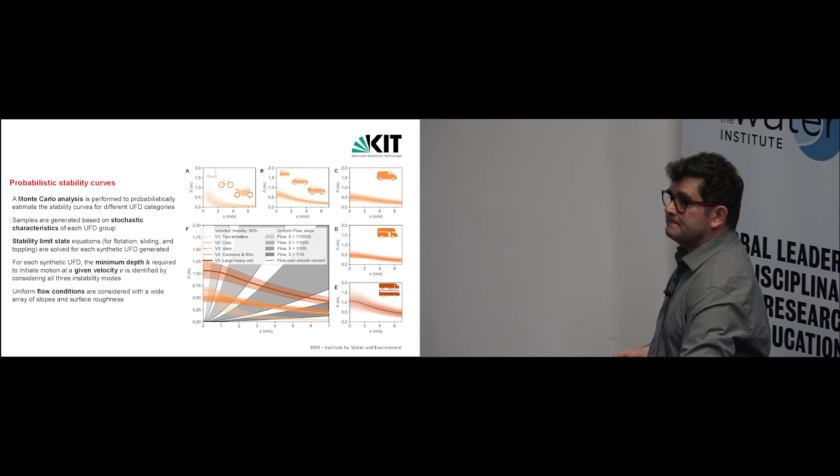And we have this for the other types of debris, for wood trunks, for other things. So there are several of these, separate for each. I didn't put it here because each type has its own structure. But of course, some of them are much more uncertain than others, and for small rubbish it's much more uncertain.

That's why we are now starting a new project with a university in Spain, because they have a street where they can generate precipitation and flow, and we are starting to study small things like this, and plastic bags and things.

I see, these are all structures. I know you are calling the vehicles and everything debris, but I'm just trying to see, did you think of how the duration of inundation can affect these in any way? The stability not, but of course the transport will be affected. But that's the next step. Yes, okay, I see. Thank you.

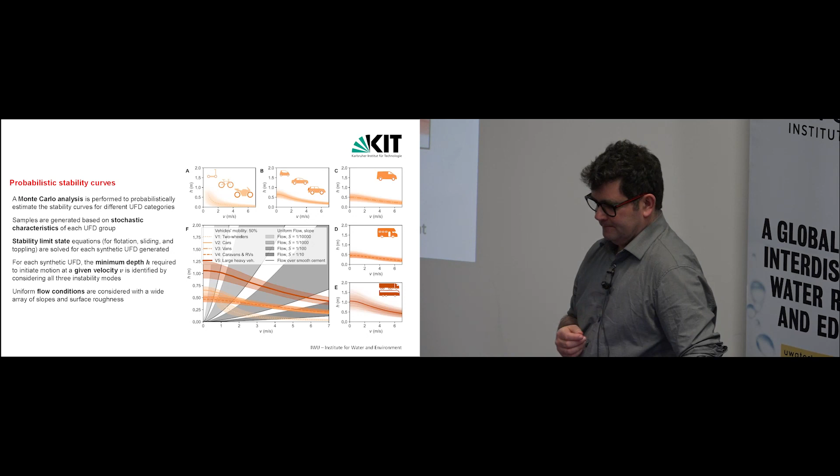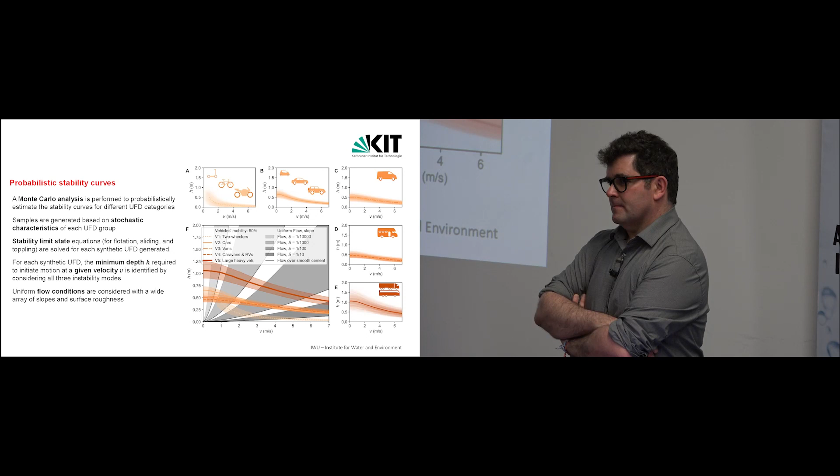So if I look at this figure, it seems like the small vehicle will be easily moved by the flow. That's basically the general trend. And if I'm a manager, I would consider having fewer vehicles for some regions that have higher flooding risk. So how can this finding generate some different managerial approach? Well, from here you don't go directly to managing the flood in the urban area.

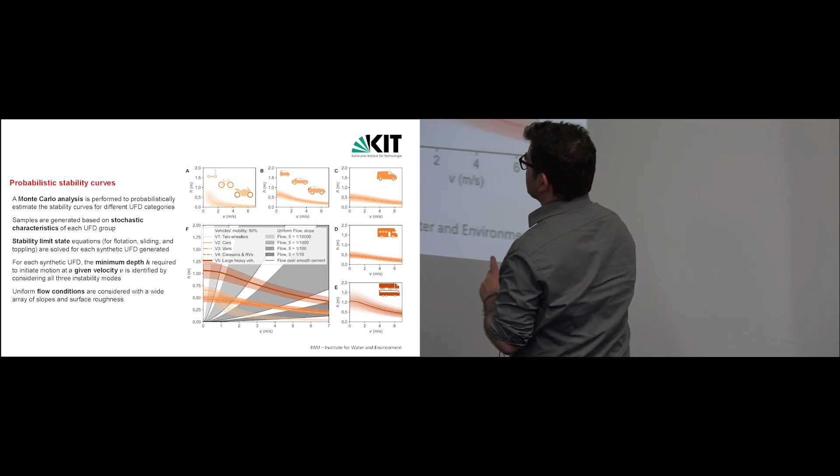I think it's more, for instance, you pick up one of these. So now this is a kind of large debris. And now you combine this with the flood, and later with the transport. And then you will see the conditions of instability, the conditions of transport, that hopefully we'll be able to tackle as well.

We provide a model, and we model how they are transported, how many can clog a street or something. This doesn't serve for that, let's say. This is just an auxiliary curve for the transport. But then you can reach the conclusion that, okay, you cannot have this type of object in that street, or you have to make parking for them or something like that.

But for instance, you may have a small street in the old town where you don't have these big trucks for sure, so some of these scenarios may not happen. If you're in the Netherlands, it's full of bikes, for instance. But this is another step of the characterization of what exists in the streets.

So the message is, it's better to build a model to get a more accurate result? No, I don't think you can infer those conclusions from this alone. You have to have more knowledge or model more. Okay, thank you so much.